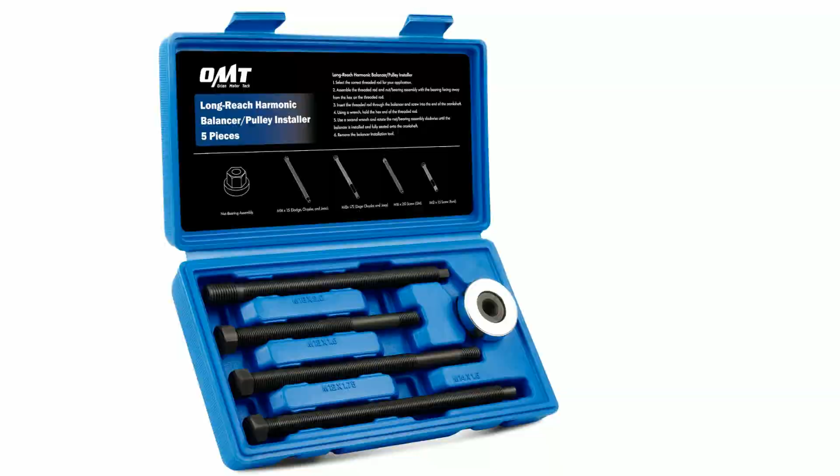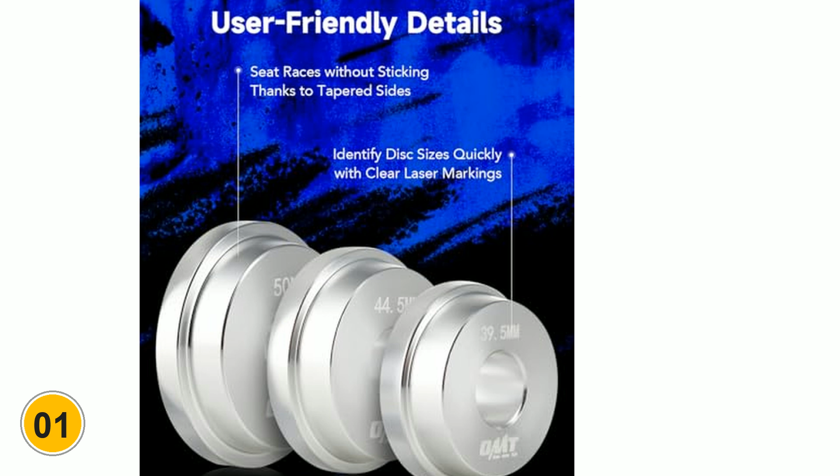Product number 1, Orion 10-PC Bearing Driver Set. This Orion Motor Tech 10-piece bearing driver set caught my eye because it's compact, affordable at $33.58, and claims to handle both installation and seal driving. If you want a lightweight, no-frills kit for basic bearing racework without breaking the bank, this is worth a serious look. The aluminum build keeps it light, and the knurled handle gives decent grip.

It's only for installing bearings and seals, not pulling them out. So if you're dealing with a seized or stuck bearing, this won't help. Some buyers expected full removal capability and were disappointed. Now, if you're just doing routine maintenance or replacing seals, this works fine. But if you need to actually extract a stubborn bearing from a hub, you'll need something stronger.

This is perfect for DIYers doing light garage work who don't need heavy-duty extraction. Skip this one if you're tackling rusted or frozen bearings. It simply wasn't built for that.

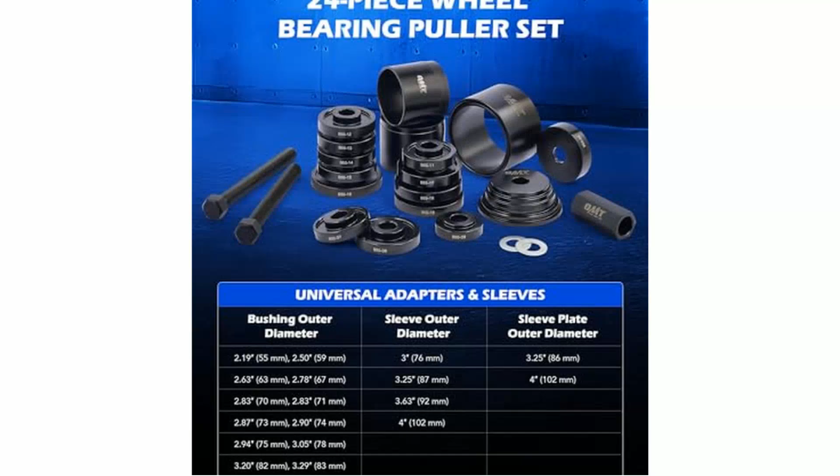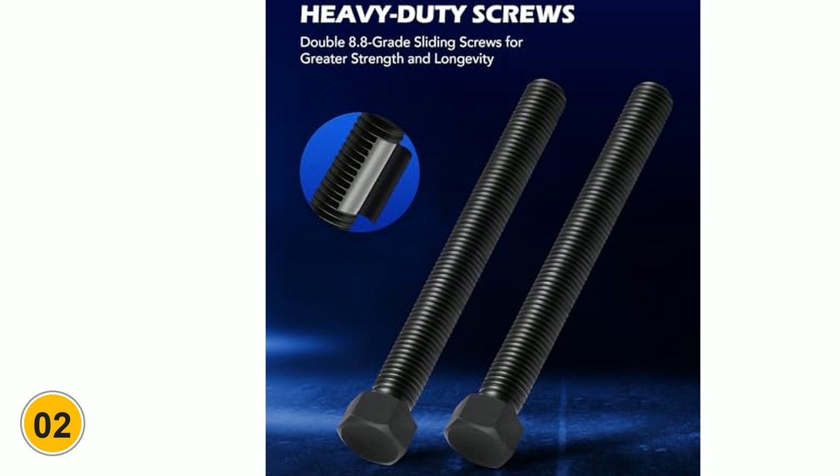Product number 2, Orion 24PC Wheel Bearing Press Kit FBA 701. Now, if the last kit's lack of removal power frustrated you, this Orion 24-piece wheel bearing press kit steps up big time. Priced at $90.07, it's designed specifically for front-wheel drive bearing removal and installation. No hammering, no damage. That's huge if you're trying to keep your alignment intact.

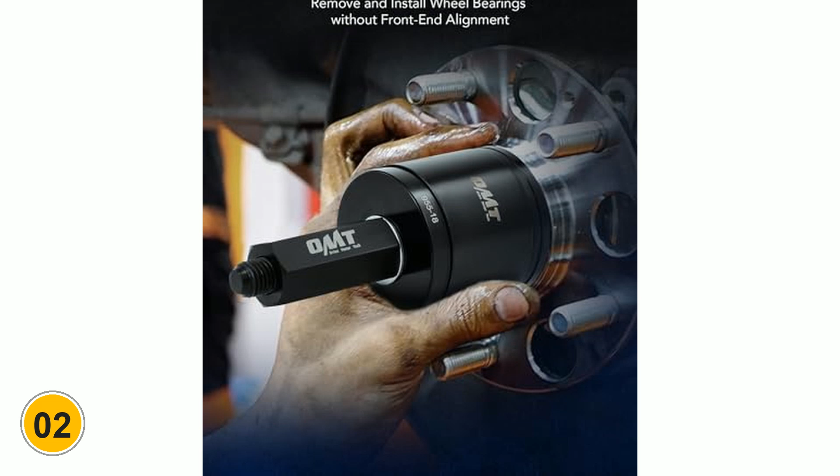It includes multiple sleeves and bushings for near-universal fit on domestic and foreign cars. The stainless steel build feels solid, and the blow-molded case keeps everything organized. But here's the flaw: at 24 pounds, it's heavy. Not impossible to move, but definitely not something you'll toss in a small toolbox. Some users also noted the threads need regular lubrication or they can seize up. Still, for the price and function, it's a reliable choice.

This is perfect for home mechanics or small shops doing frequent FWD bearing jobs. Skip this if you're working on tight budgets or need something ultra-portable.

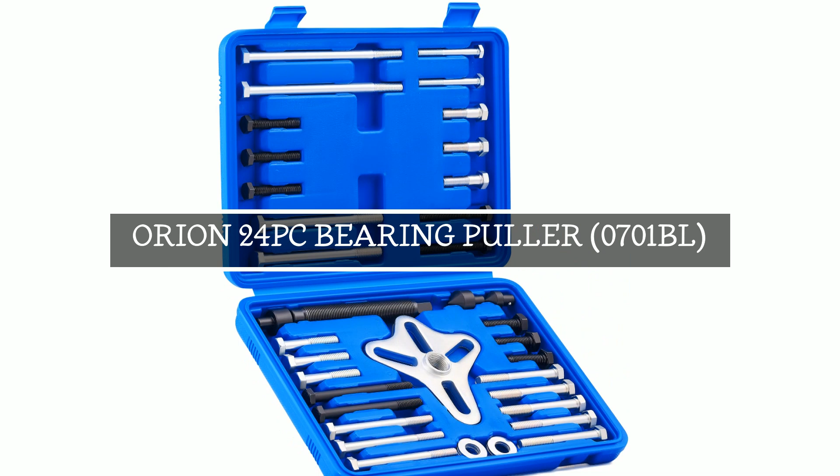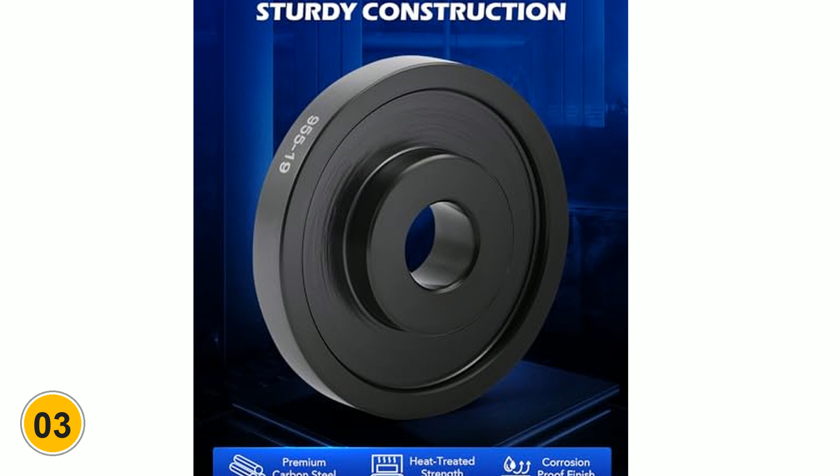Product number 3, Orion 24PC Bearing Puller 0701BL. Alright, that was a solid option. But the next one on my list might actually be better for consistency. This is the same Orion 24-piece kit, model 0701BL, also $90.07, but with slightly different dimensions and weight at 24.6 pounds. Because some buyers reported minor fit issues with the FBA 701 version on certain Honda and Toyota models, this one seems to have tighter tolerances.

The heat-treated, blackened screws resist corrosion better over time, which matters if you're using this in humid or salty environments. The downside, same weight issue, this is not a grab-and-go tool. And honestly, the instructions could be clearer. A few users struggled with assembly on first use.

This is perfect for you if you're working on a variety of imports and want a kit that won't slip under pressure. Skip this if you only work on one car model and don't need universal coverage.

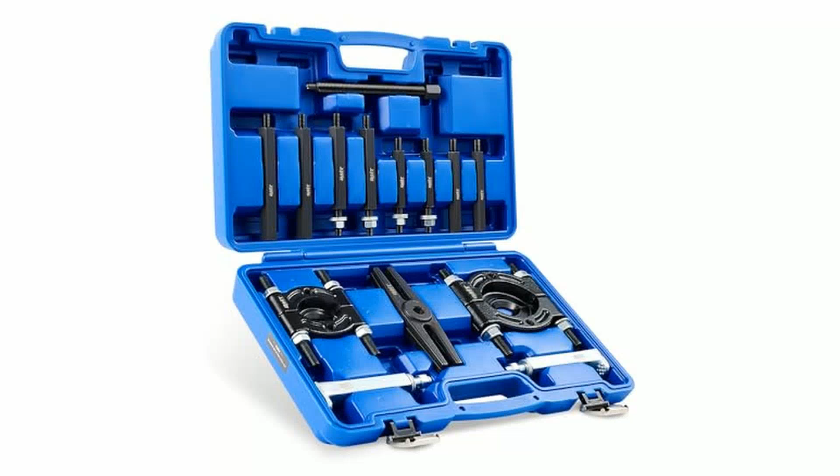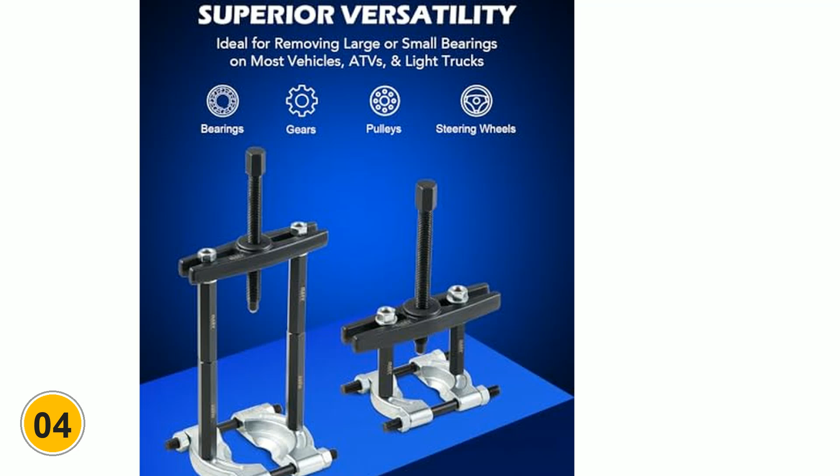Product number 4, Orion 5-ton Bearing Separator Set. Now, if you're dealing with bearings that are really stuck, think rusted axle shafts or seized pinion bearings, this Orion 5-ton capacity puller set is a beast. At $63.05, it's cheaper than the press kits but built for brute force.

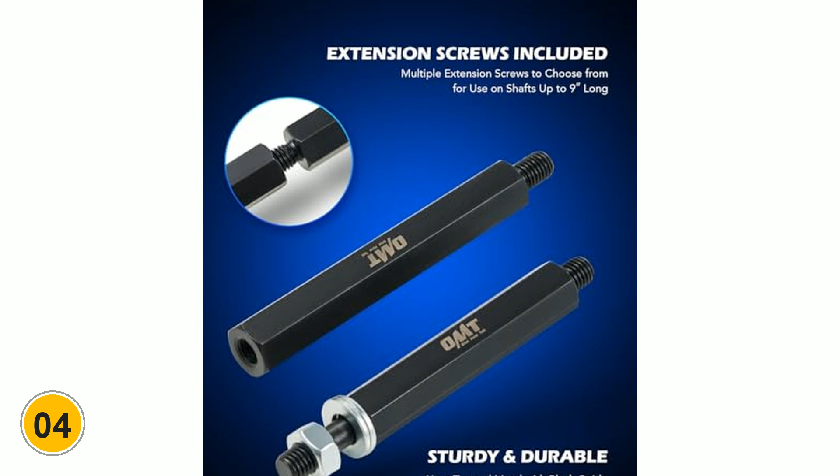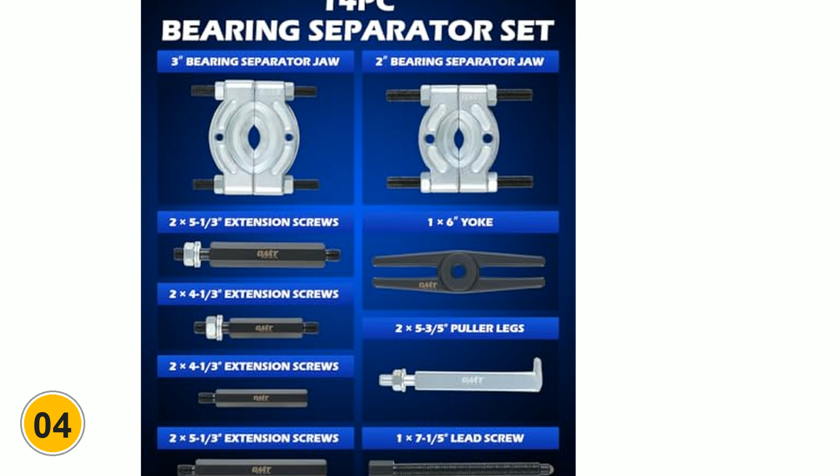The 2 and 3 jaws with knife-like tapers slide behind tight bearings, and the 5-ton capacity means it won't flinch under pressure. It's made of heat-treated CRV steel with a black oxide finish, so it resists rust and handles repeated use. This is ideal for rear-wheel drive trucks, ATVs, or older vehicles where bearings fuse to the shaft.

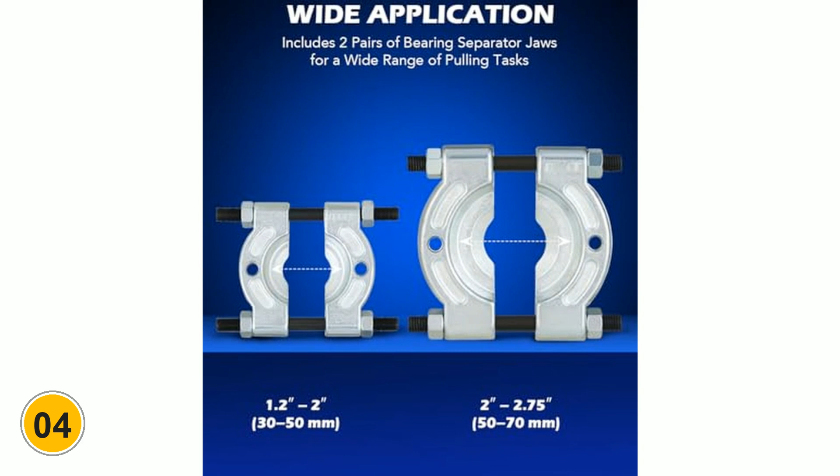But here's the honest flaw: it requires space. You can't use this in tight wheel wells without disassembling more than usual. Some users also said the L-type legs can bend if over-torqued. Still, for the power it delivers, it's a great mid-range option.

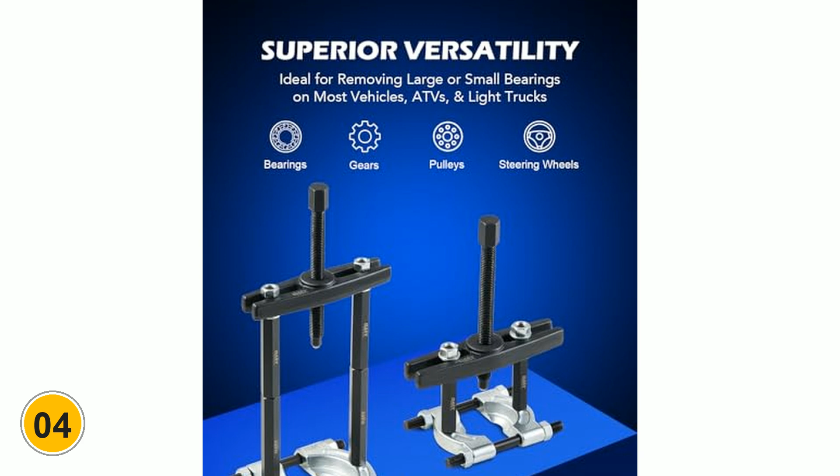This is perfect for you if you're a DIYer tackling tough jobs or restoring older vehicles. Skip this one if you're only doing quick front-wheel drive swaps. It's overkill and harder to maneuver.

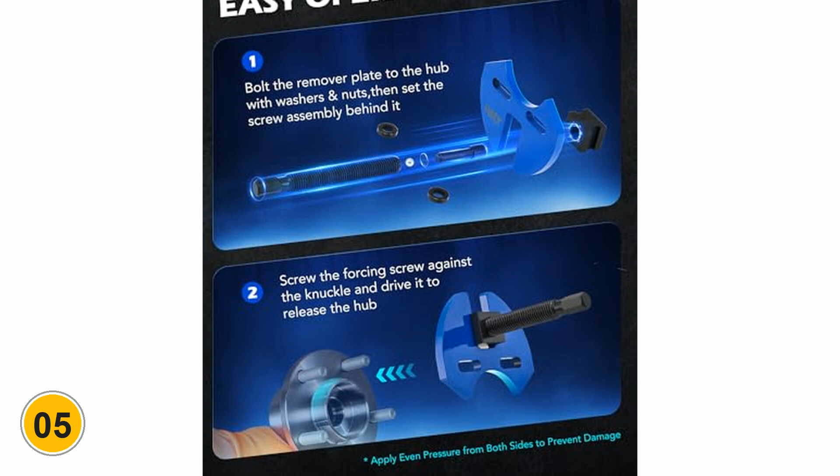Product number 5, Orion Wheel Hub Buster Puller. Finally, if you're struggling with stubborn wheel hubs, especially on trucks with 5, 6, or 8 lugs, this Orion Hub Remover Kit is a lifesaver. At $56.23, it's specifically designed to break free-seized hubs without damaging the axle.

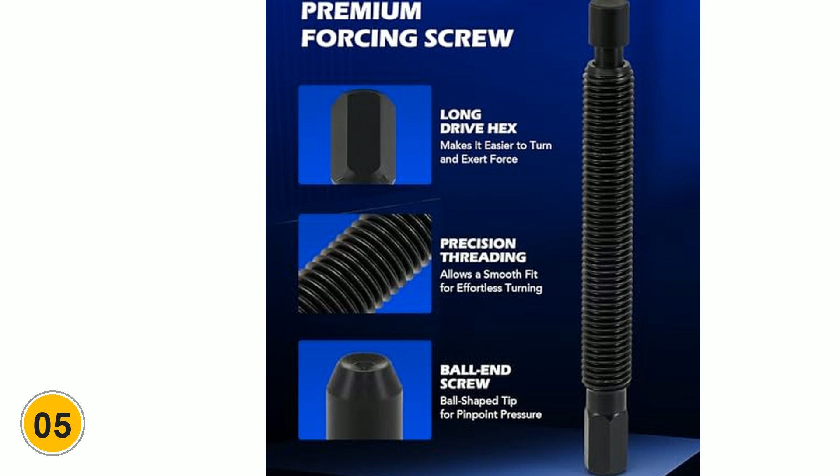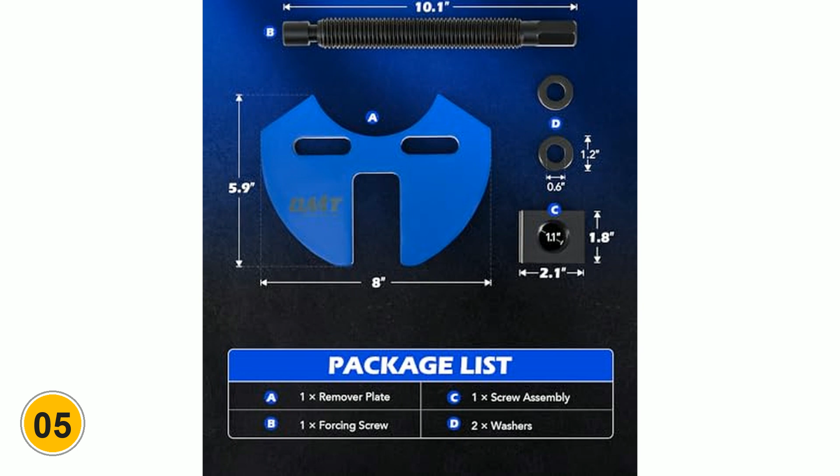The AISI 1045 steel construction and heat-treated forcing screw give it serious strength, and the included remover plate distributes force evenly. It's compact, comes in a molded case, and works fast, no more beating hubs with a hammer and risking damage. But here's the catch, it's not a full bearing removal tool. It gets the hub off, but you'll still need another tool to press out the actual bearing.

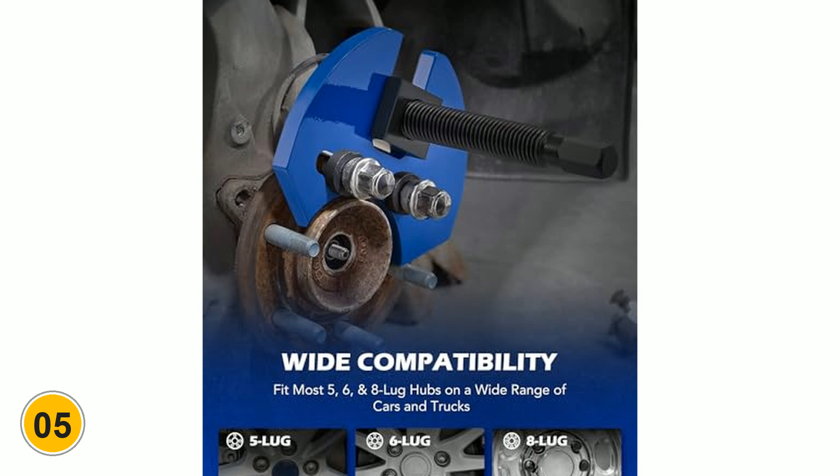Some buyers assumed it did both and were let down. Still, for hub-specific jobs, it's excellent. This is perfect for you if you're working on trucks or SUVs with tight hub assemblies. Skip this one if you need a complete bearing replacement solution. It's only part of the puzzle.

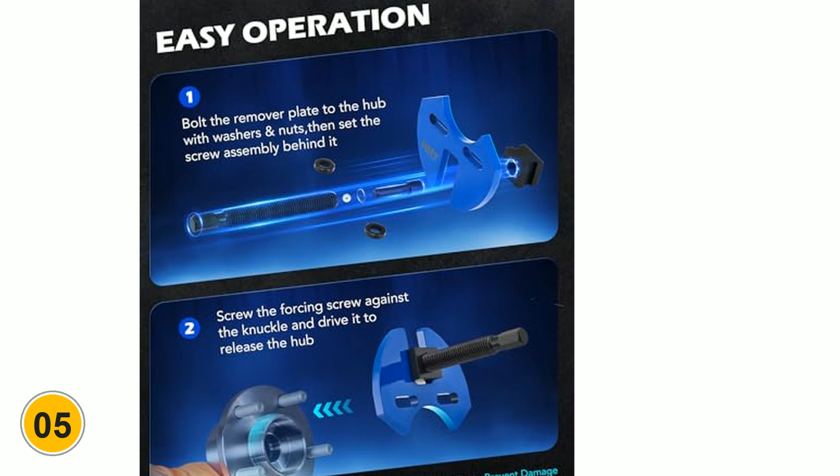So which one should you buy? The 10PC driver is great for installs only. The 24PC press kits are best for full FWD jobs. Pick the 701BL for tighter fits. The 5-ton separator handles brutal extractions, and the hub buster saves your axle on stubborn trucks. None are perfect, but each shines in the right situation. Match the tool to your job, not the price tag.